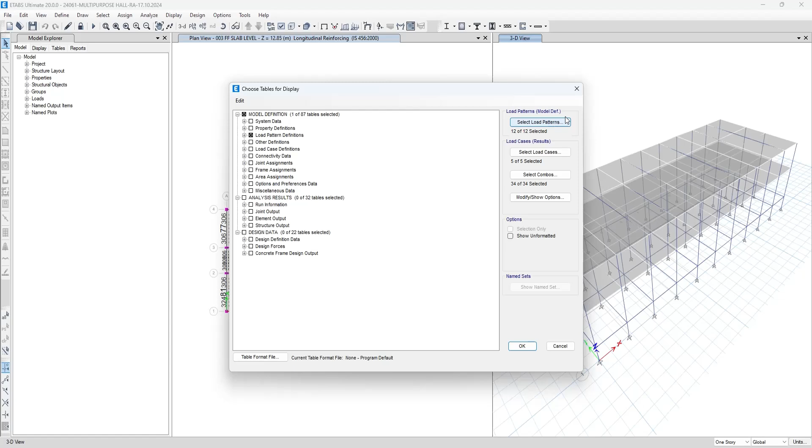Now open the DraftWin software, click on the footing module and click on file and footing API to import the results from ETABS. It will directly import the results from the currently opened ETABS file. As you can see, the columns have been imported and the basic footing numbers, size and basic parameters have been defined. Now you have to go to options and design settings.

It will give you the form to input the values of material, soil, sizing of footings and reinforcement. Let us see one by one option. In the material and soil, you have to provide soil data as well as material data of concrete and steel. In the first option, it gives you the option to input the soil weight, loss of contact. Loss of contact and soil weight will be worked out when there is tension in the footing, and you can consider 100% of soil above footing as a counterbalance in case of uplift.

You have to provide the foundation level below the ground, that is in this case 2.5 meter. You have to provide the footing depth and you have to provide the soil type, that is hard, medium or soft. Based on the soil type, the SBC will be increased as per IS 1893 and 875. You have to provide the SBC of soil at the depth you have defined. You have to provide concrete grade, steel grade and unit weight of concrete.

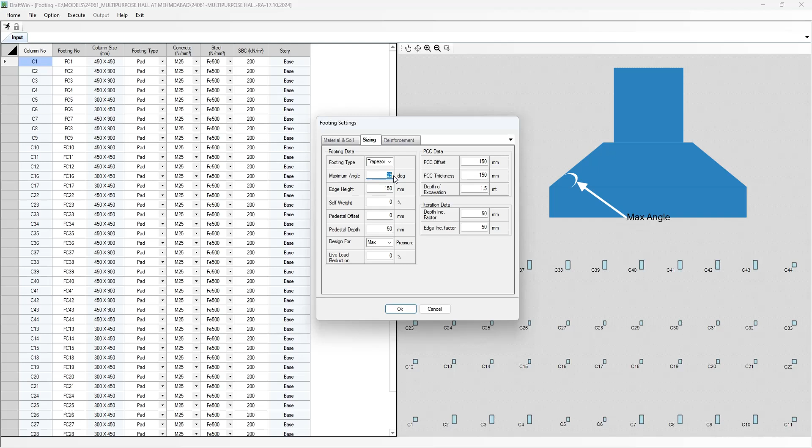In the sizing tab, there is footing data, PCC data and iteration data. Let us see one by one. You can decide whether you want to do the pad footing or trapezoidal footing. If you do trapezoidal footing, it will give us the maximum angle, that is the maximum angle of slope that you want to maintain. And at the edge you have to give the edge height.

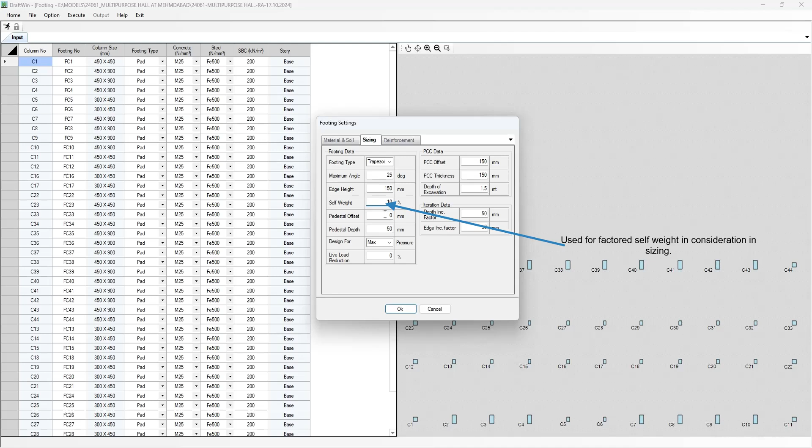By default DraftWin will take the self weight of footing in the calculation, but if you want to increase the percentage of self weight to be taken, you can add it in the self weight percentage. If you provide 10% here, it will calculate self weight of footing as 1.1 times, that is 10% more than the self weight of footing.

You can give the pedestal offset. In our case we generally give 3 inches, that is 75 mm total for pedestal offset, so we will have to give pedestal offset as 37.5. Pedestal depth, you can give the pedestal height from the footing; generally we give the pedestal height up to ground level. In this case it will be 2 meter, 2000 mm.

And you can give options for designing of footing for maximum pressure as well as actual pressure. When the area is calculated, the pressure can be below the SBC value. So you can decide whether you want to design the footing for actual value or for maximum pressure, that is SBC of soil. Live load reduction, this option will not be worked out here, but you can reduce the live load.

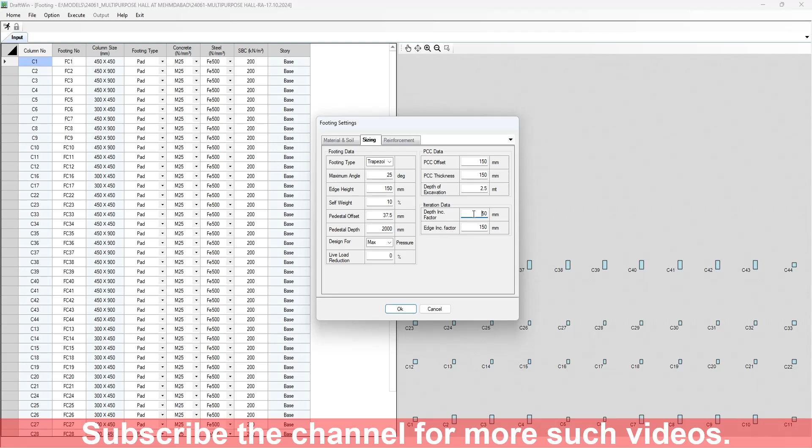In PCC data you have to give the PCC offset, PCC thickness and depth of excavation. In this case it is 2.5. You can give iteration data, that is you can give command to the program to increase the depth at 50 mm intervals, and edge increment, that is the size increment. We generally give 150 mm gap between two footings, that is 6 inches between two footings. It will group the footings accordingly.

In reinforcement data you have to give a clear cover and initial depth of footing, that is total depth of footing, to be decided for calculating the reinforcement. You have to give the minimum and maximum spacing of reinforcement, and interval of round off of spacing. We generally give spacing in the interval of 25 mm, so we are giving it 25. This option, that is typical bend, will be used in calculation of quantity. You can check mark the reinforcement that you want to use in the footings.

Press OK, and as you can see, the type, concrete, steel and SBC will be changed in the input data. Then you have to go to load cases. As you can see, it has taken load cases, that is load patterns and load cases from ETABS itself. You have to uncheck the load patterns because you have provided the cases. In this case, we have given load cases in ETABS.

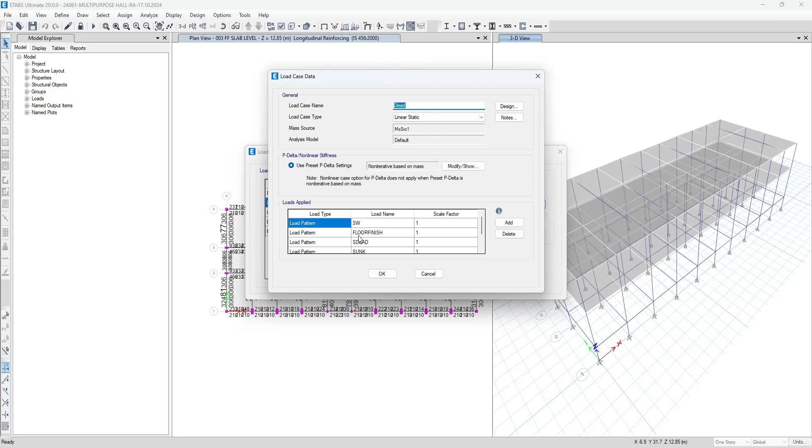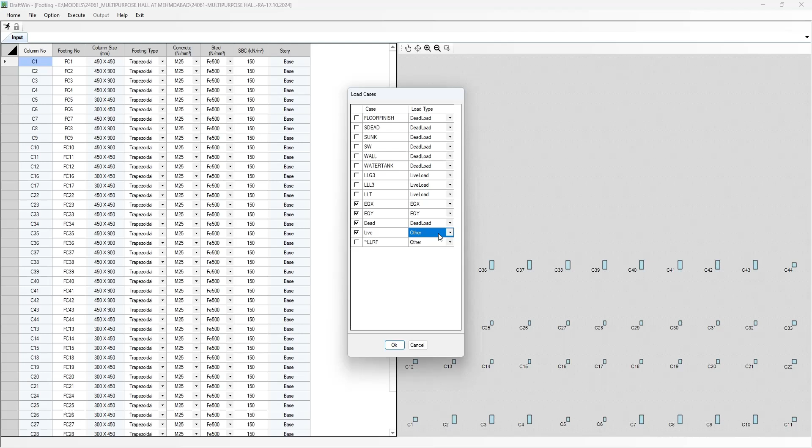As you can see, in defined load cases, we have created dead and live cases. The dead case has all the load patterns which comprise the dead load. So we are just selecting the load cases as dead and live, and in the type you have to define that this is the dead load and this is the live load. Press OK. It will open the load combination dialog box. In the combination, you can take the load combinations from analysis as well as for regular or irregular structure.

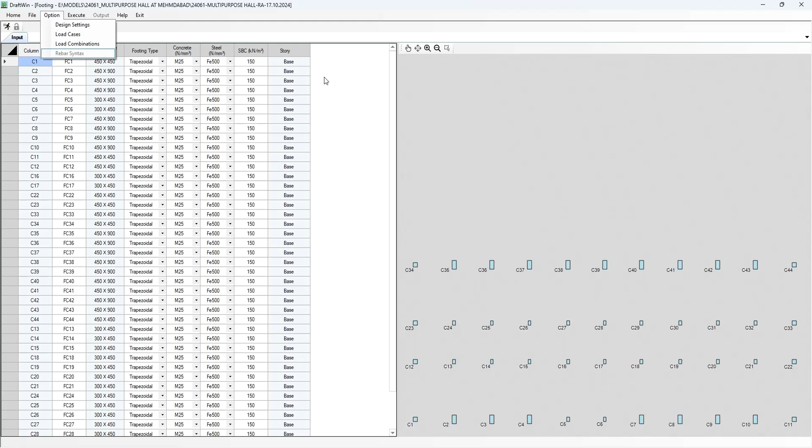We are taking for regular structure. It will add the load combinations for regular structure, and OK. The load cases and combinations have been defined. Now rebar syntax. Once you design the footings, let us run the footing design.

It will design all the footings and give you the footing size, column size, that is pedestal size in our case, because we have given the offset for pedestal. Concrete grade, steel grade, AST required lengthwise and widthwise, and reinforcement provided lengthwise and widthwise. You can redesign any footing from here. Select the footing, click here, change the data and redesign it.

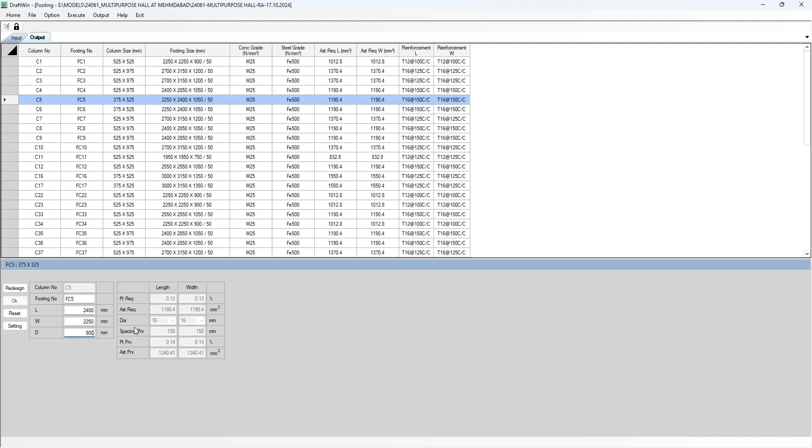It will show that it failed in punching shear, so you have to give the depth again to the original one. Reset it and press OK. In the settings, you can see the original dialog box that we have been using for designing of footing will be opened. Cancel it, go to any other footing, and you can change. Once the design has been completed, you can change the reinforcement from here. It will be showing you the required reinforcement and everything.

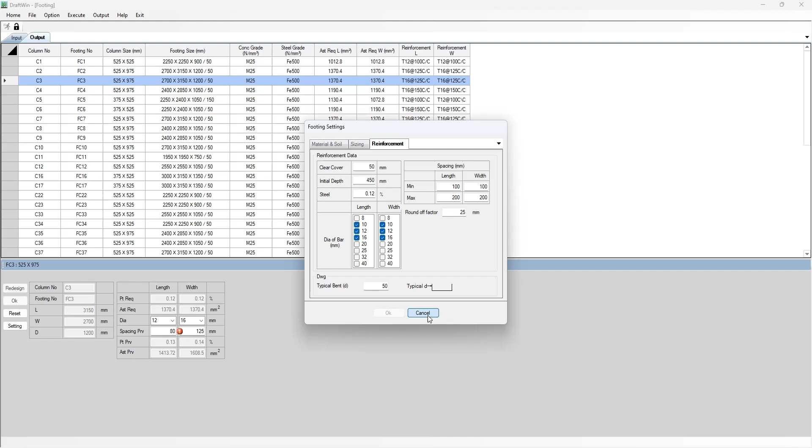As you can see, you can change the reinforcement from here. We are requiring 1370 mm square and we are providing 1413. We can go up to 145, I guess, or we can say 290, sorry, 80, but it is showing you I, that is information. The spacing should be between 100 and 200. Why? Because we have given the reinforcement spacing criteria here. That is why it is showing like this.

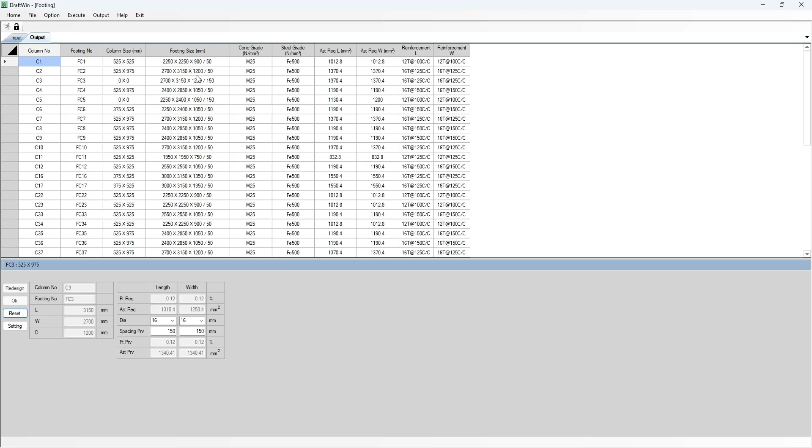You can reset it at any point of time, and once the design has been completed, you can see the rebar syntax. That is how you want to see the reinforcement to be written. In our case, we generally write T afterwards and press OK. So the reinforcement will be seen like that. In the output, it will give you the layout and schedule. Press it and save the drawing. Press yes, and it will ask you to group the similar footings.

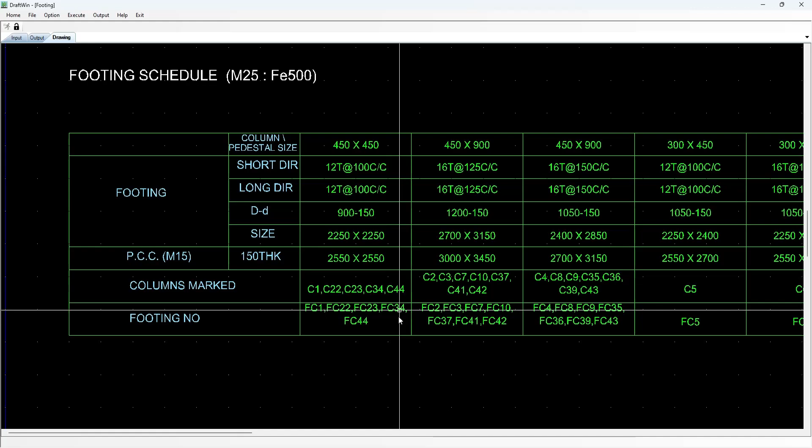Press OK, and it will give you the layout of footing, typical section of footing, and the footing schedule, and it has grouped the columns which have common footing. In the schedule, it is giving you the column or pedestal size, shorter direction reinforcement, longer direction reinforcement, capital D and small d. This will depend upon the maximum angle that you have given. You will have to iterate in order to get the actual value that you want to use in your projects. It will give you the size of footing and size of PCC, column numbers and footing numbers, and it will give you the 1:100 scale footing layout.

You can see the drafting settings here, object snap, polar tracking and all. The drawing has been exported to the DXF format in the folder that you have saved it to. As you can see, the footing has been saved here. You can open it from here, and in the CAD file you can just use them for your further detailing. You can directly use this.

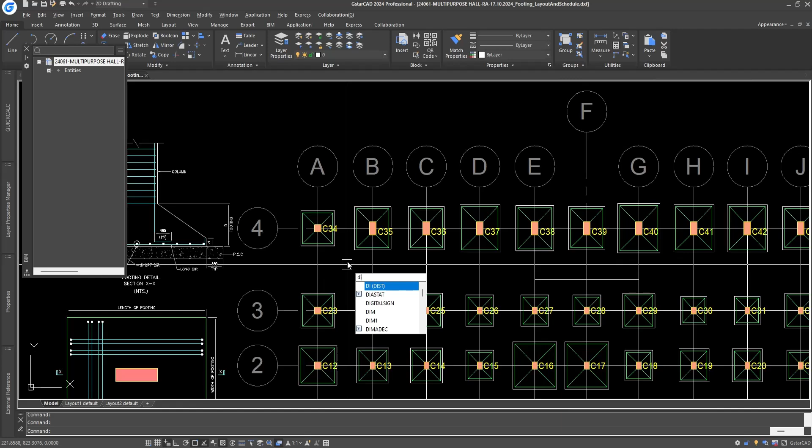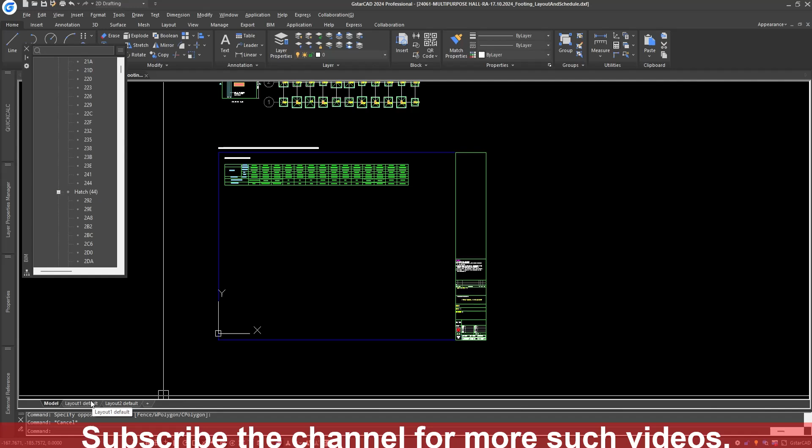Let us see how the distance has been given. As you can see, the distance is given 22.50 and 22.50, that is, the layout is in 1/100 scale. This is a general scale that the footing layout is being given by Draftwin. It gives you a standard template, which you can set for use in your drawing. You can change these details and use it. This way you can design isolated footing using Draftwin.

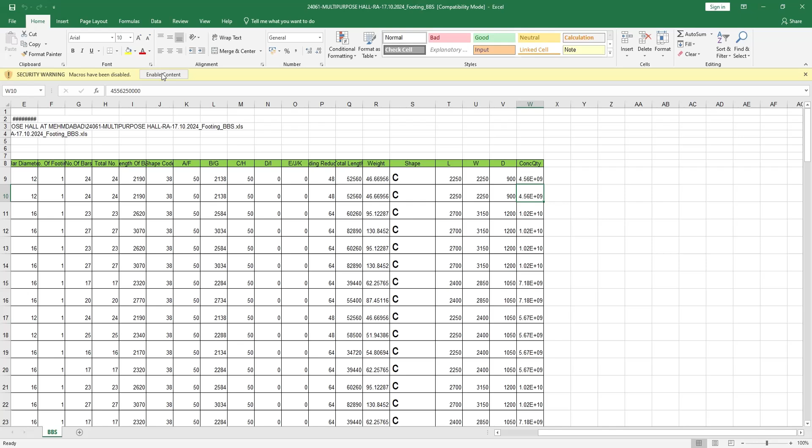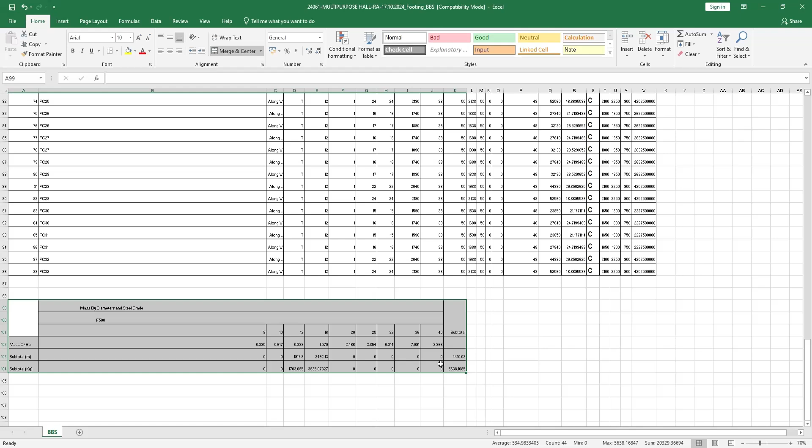It also gives us the quantity, that is BBS. Press it and it will give you the Excel file for the BBS like this, and it asks you to save the file. Let us just go to BBS and open that file. As you can see, it gives you the file name, the time it has been exported, file created, and for each and every footing it gives you the diameter and the type, as well as the concrete and steel quantity. It gives you the mass and total quantity of materials to be used. So it is easy for you to decide how much footing steel will be used in your footing design.

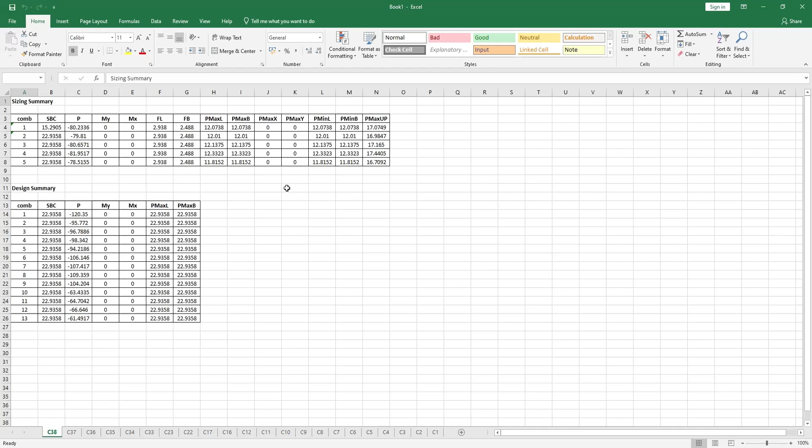This way you can get the quantity as well, and it gives you the analysis summary for any footing. It gives you the SBC, the total pressure and size. Sorry, this is total load and the load that has been used for design. When you export it to Excel, it gives you the Excel file for each and every footing, the pressure summary and sizing summary. As you can see, it is writing down each and every footing. Press save and it will ask you where you want to save it.

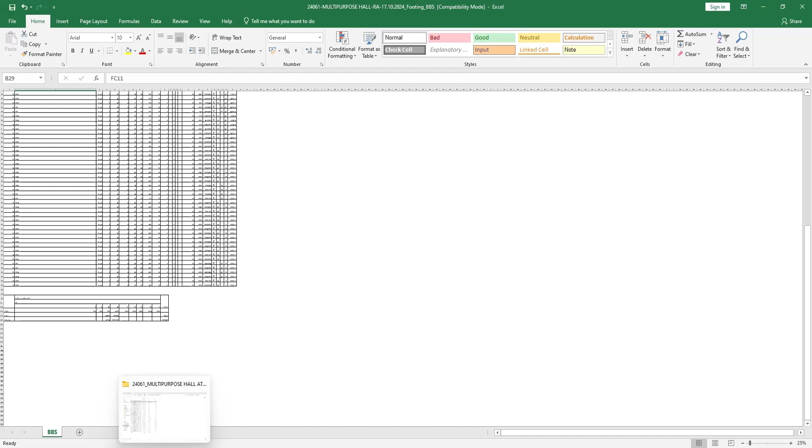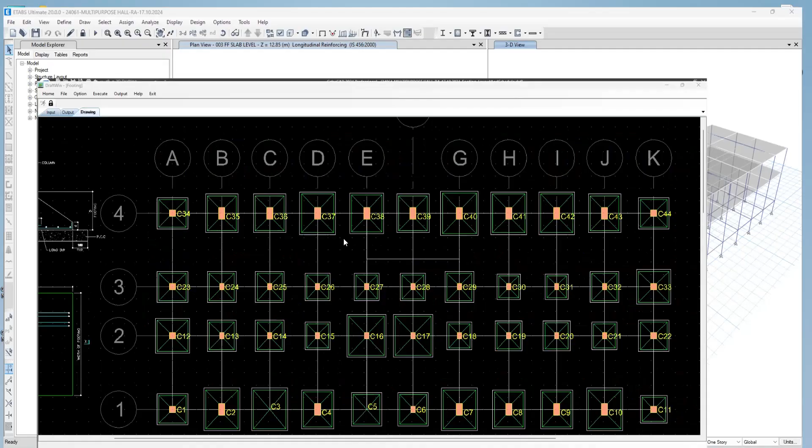It has been saved somewhere, and let's open it. Sorry, it has redesigned it. It will give you the summaries of footings like this. Let's say not to be saved. Close the Excel file and open the analysis report and export schedule to Excel. It can give you the schedule to Excel as well. We just have to save it somewhere, and as you can see, the footing schedule will be saved at desktop. For each and every footing the details have been given to Excel as well, but mostly you don't need that because you have the schedule here itself. This way you can easily design footings.